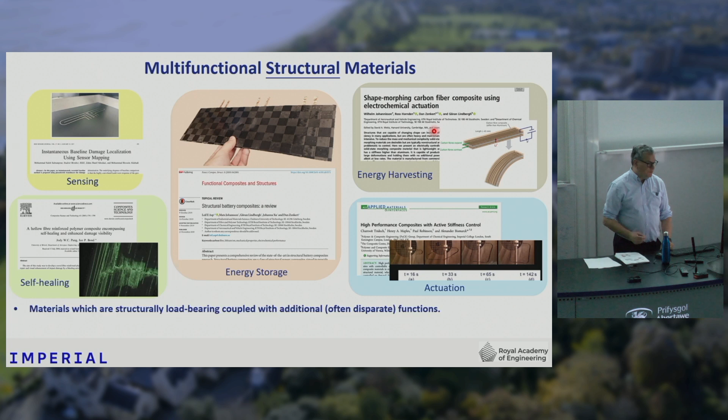What I ought to reinforce first is that we're really going beyond this idea of smart materials and smart structures. There's a lot of work that's been going on for decades embedding sensors or batteries into structures. For instance, this is some really nice work done by the US Navy, going on for about 15 years, looking at embedding lithium-ion batteries into aircraft structures - these are UAVs - as a way of making more efficient structures.

So this idea of embedding devices, embedding batteries into a composite structure, is actually relatively mature. But what we're doing is really going beyond that. We're not trying to embed a structure, we're not assembling a product out of a monofunctional structure and a monofunctional battery. We're actually trying to imbue the same material to do two things simultaneously.

For instance, the carbon fibers that we use within our material carry structural loads - these are aerospace grade carbon fibers. But those same carbon fibers have lithium ions intercalating into them and out of them to add a battery function. So the technology and challenges with this are much more immense than for just embedding a battery, for instance.

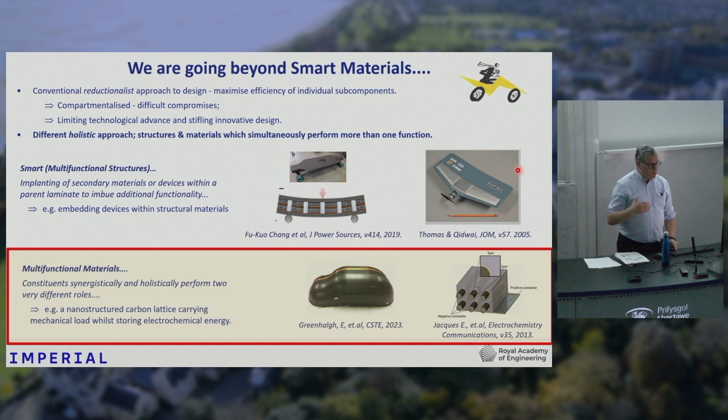But the rewards from doing this are enormous, and I'm going to elaborate on that in a minute in terms of what achieving this idea of structural power materials is going to mean in terms of our day-to-day lives. But to give some context to what's really driven us this way is this whole issue of sustainability and the issue of energy storage and electrification of transport.

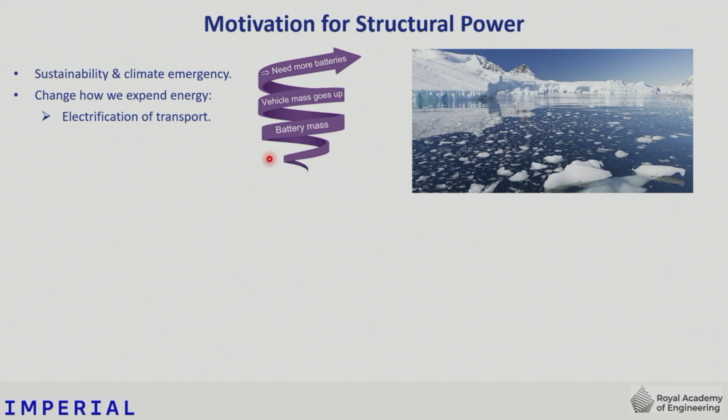So if you're looking at an electric car, the issue you have is that you have a car with a number of batteries in, but you need to put more and more batteries in to improve the range of the vehicle. But adding more batteries adds more mass, so you need even more batteries to be able to do that journey. If you want to double the range of the vehicle, you can achieve that with the same amount of energy by halving the weight of the vehicle. So things like Tesla cars, for instance, about 25% of the weight of the car is actually the batteries. So you're expending 25% of your energy just moving the batteries from A to B.

So that in itself is really not very efficient use of these materials. It's parasitic weight. In aerospace, this is even more of a problem.

There's been a really big drive in aerospace toward the idea of a net zero aircraft, a long-haul passenger plane that's not using any aviation fuel by 2050. The challenge is that if you're using kerosene in an aircraft, about 30 kilograms of kerosene is required for each passenger. If we use batteries with current battery technologies, which have an energy density of about 250 watt-hours per kilogram, you'd need 1,000 kilograms of batteries per passenger. So that's really just not feasible.

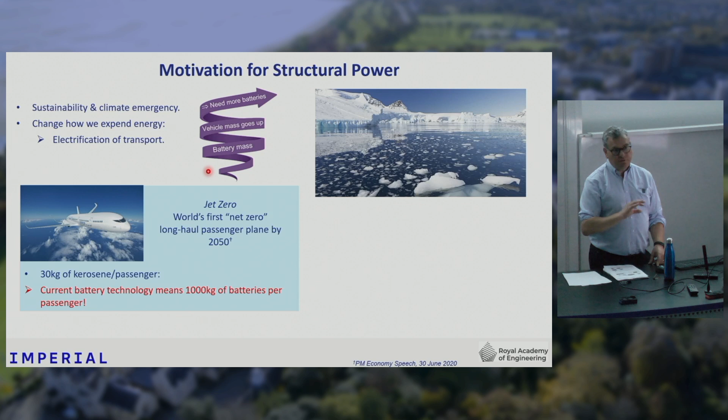If you look at the conventional electrochemistry sector, they're really trying to push forward the energy densities of their batteries, and I've got a graph demonstrating this in a moment. But the issue with enhancing energy density is that you run into sustainability issues, longevity issues. A lot of these very high energy battery technologies have relatively short lives. And there's also the issue of safety.

Aerospace is a very conservative industry. If you try to get a new material onto an aircraft, you have to go through a lot of steps to demonstrate that it's airworthy.

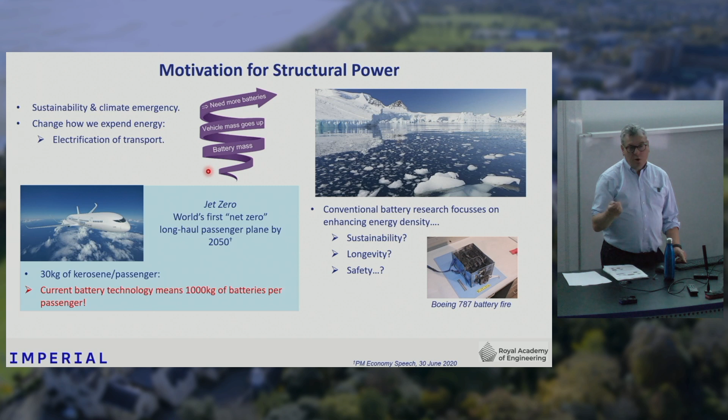So really, we felt that we need a radically different approach to how we store electrical energy on vehicles. Instead of having that parasitic weight of the battery, why not use the structural material to have an intrinsic ability to also store energy? So you won't need batteries. Your car body, the casing of your phone, would store the energy that you need for use.

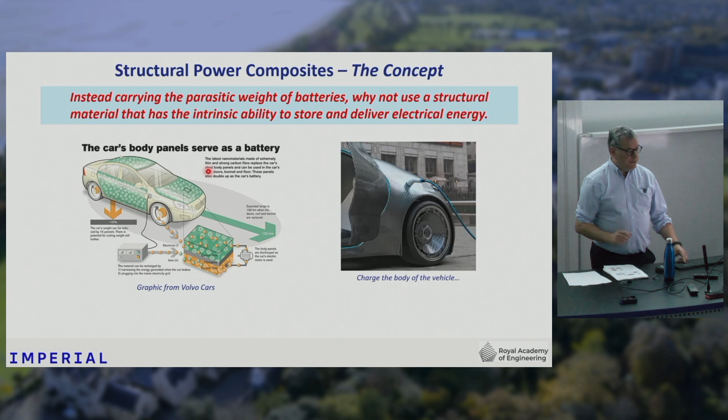We worked very early with Volvo on this concept, and they were very keen on this idea, and we've gone on to demonstrate that this technology is feasible.

There's a lot of synergies here in terms of the sciences. Although we're bringing together electrochemistry and composite mechanics, which are very different fields, there are a lot of parallels. For instance, in electrical energy storage, carbon is widely used as one of the electrodes, or both electrodes in some instances. In structural applications, we use carbon fibers, so immediately there's some synergy there. There's also the issue that carbon fiber composites used in aircraft structures are laminated structures, while batteries, again, are laminated structures. So we thought there were some synergies there we could try to exploit with this technology.

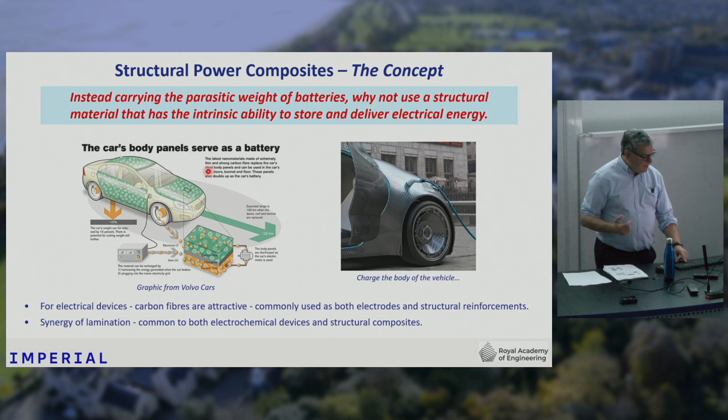Let me share our aspiration for what we hope this technology will achieve. First of all, as with any lightweighting technology, the idea that you could have a material that does two things simultaneously is going to give us lighter vehicles and more spacious vehicles. What we're trying to convey here is that you no longer need this big pack of batteries in the car, so there's a lot more space in the vehicle. What we're showing here is you're charging the vehicle. So in lots of applications, this is going to give us lighter weight, reduced volume, more spacious applications.

But we thought there are things this technology could offer beyond those conventional engineering considerations. One aspect we recognized is that a lot of products, particularly portable electronics, have their actual form factor dictated by the battery. In a phone, for instance, half the volume of the phone is the battery.

So if we could get rid of the battery, and instead use the casing of the phone, which is a structural component, and imbue that with the capacity to store energy, you could have phones as thin as credit cards, because you no longer have to think about where you put the battery. That was something we thought would be very attractive from a consumer point of view, that it suddenly opens up the space to make very slender devices.

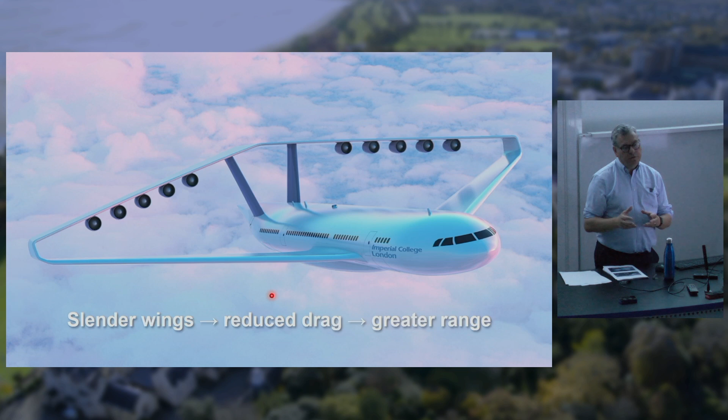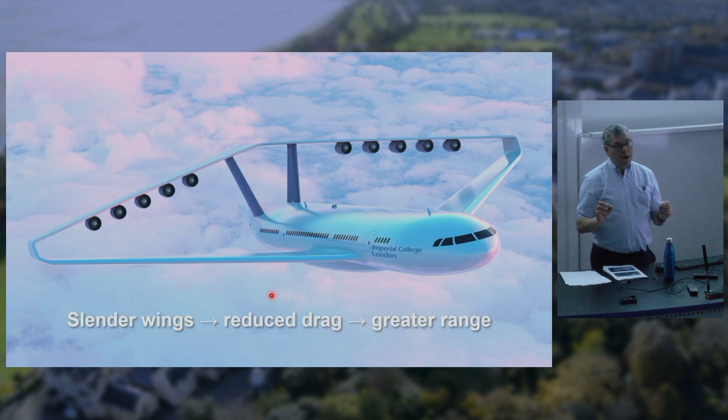As an aerospace person, I was immediately thinking about what we can do in aerospace with this. What we started to recognize was that at the moment for aircraft, you have hollow wings, and the reason is because you need to store fuel there, be it kerosene or batteries. But if the structure of the wing itself or the fuselage stored the energy, you wouldn't have to have hollow wings anymore. So you go to very thin wings, and you reduce drag and improve the efficiency of the vehicle. But if you start moving to thin-winged aircraft, you run into aeroelasticity problems.

So the whole aircraft would need to look different. You'd have to start to look at these box wing type configurations, for instance. One thing we recognize with this technology is that this is not something we can just retrofit onto an existing product. This is going to need a blank sheet of paper. It's such a fundamentally different way of using structural materials that you have to rethink everything.

As we started to think about how we could use these materials, what we started to see was that it offers localization of power storage, energy storage. So rather than having the power source remote from the actual usage of that source, you have an opportunity to bring everything closer together. For instance, in the aircraft cabin, when you're sitting on your seat watching your entertainment screen, the energy driving that is actually coming off the engines of the aircraft.

And if you took away the panels in an aircraft, you'd see enormous looms of wiring. So we thought, what if we actually made the floor of the aircraft cabin out of our material, and then that would power these seat-back displays and the USB ports on the aircraft. I'll show you in a minute a study we've done that demonstrates this offers a huge weight saving. This concept offers an opportunity to localize where you store your energy for a particular application.

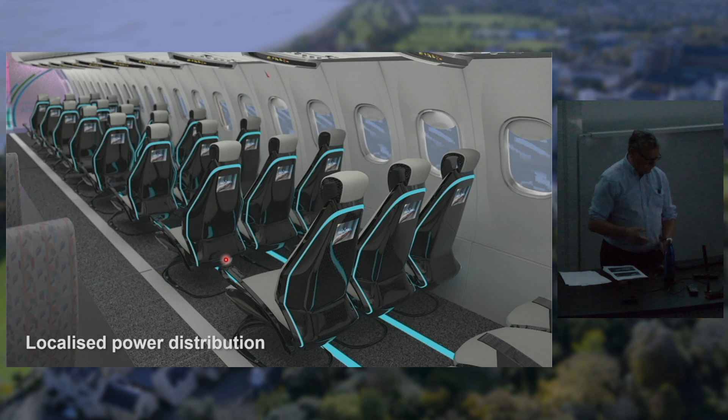Then, in the wider context of how this could go beyond transportation, one thing we started to think about was infrastructure. So where you're looking at using solar panels on your house, at the moment you have to have a great big bank of lead acid batteries in your basement to store all that energy. But what if you actually made the bricks of your house into batteries? So the walls of the building would actually store the energy that you capture with the solar panels.

So this is where we saw this technology going. This is all aspiration - we're nowhere near achieving these things yet, but we're trying to think about where this technology could take us if we overcome the challenges. And I'm going to talk a lot about what the challenges are with this technology.

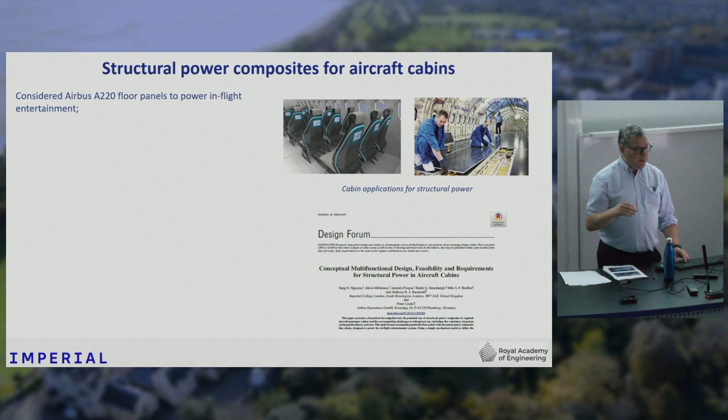So let me focus on that cabin application I spoke about. This is a paper we published 2 or 3 years ago where we looked at an A220 aircraft, and considered using the floor panels to store energy. We started to think about what level of performance we would achieve in the next 5 years or so.

So we chose a modulus for the laminates of about 28 gigapascals, and we chose energy and power densities of 144 watt-hours per kilogram - almost half that of a conventional battery - and a power of 0.29 kilowatts per kilogram, which is akin to what you get with a conventional battery.

So for those of you who are not electrochemists, these are 2 parameters often used to define energy storage devices. The specific energy tells you how much energy you can store per kilogram of material, and that's in watt-hours. The specific power is how quickly you deliver that energy - so that's watts or kilowatts per kilogram.

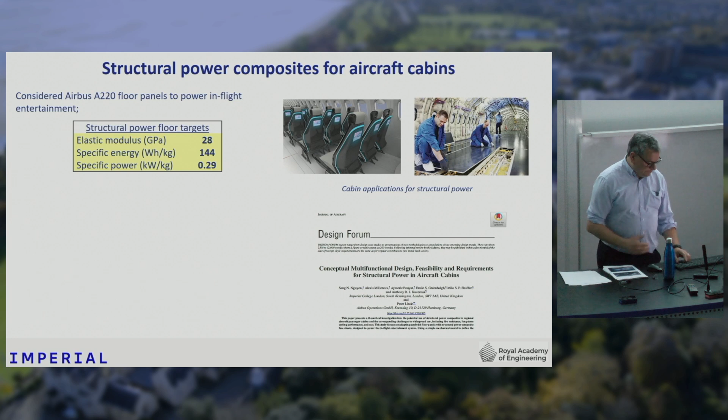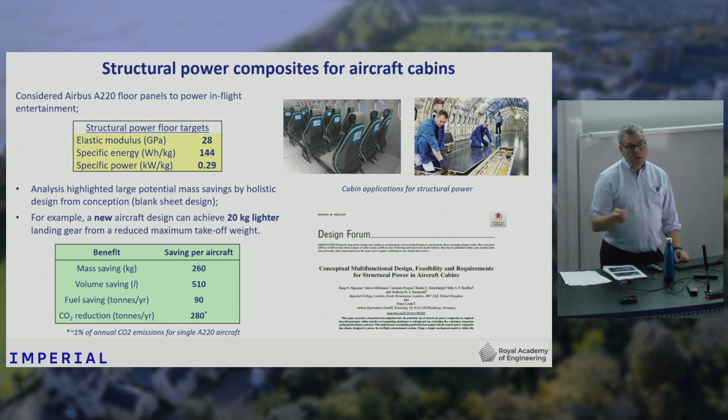Okay, so taking those numbers, we started thinking about redesigning the cabin, looked at all the electrical systems and the electrical demands on that system. We identified that if we took an A220 and put this system into the vehicle, using those performance targets, we'd get a weight saving of 260 kilograms per aircraft - equivalent to about 500 litres of space saved.

We then translated that into CO2 reduction. So for that vehicle, it would result in 280 tonnes per year of CO2 reduction. That's about equivalent to 1% of the annual CO2 emissions of a single A220 aircraft on its typical flight schedules. So this was very attractive, and we think cabins is one of the early adoption routes we see for this technology.

We've also done some other studies trying to understand how this technology could be applied to other areas in aerospace. What we've been trying to do here is identify the target performances we need to achieve in our materials to actually offer a benefit, and that's helping us identify the routes we need to take with this technology.

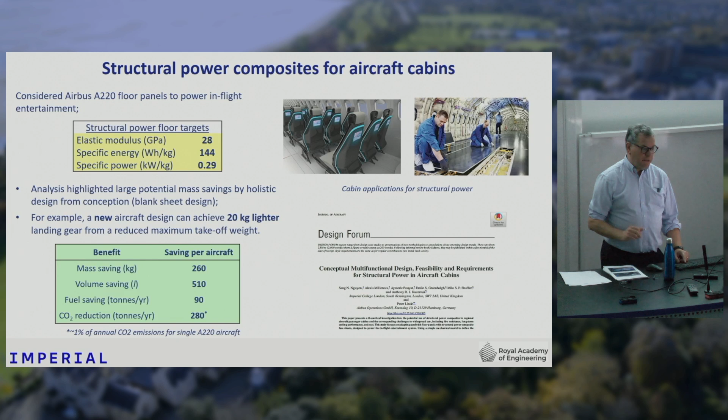These air taxis hold about 4 people. They don't have a pilot, it's all autonomous. Various companies like Vertical Aerospace and Airbus are developing these types of vehicle.

These are fully electric vehicles, and the challenge is that the battery technology is not there yet in terms of allowing them to have a significant, useful range. For instance, the City Airbus vehicle, probably a previous incarnation of the development, has a range or endurance of 15 minutes with the batteries they're using at the moment.

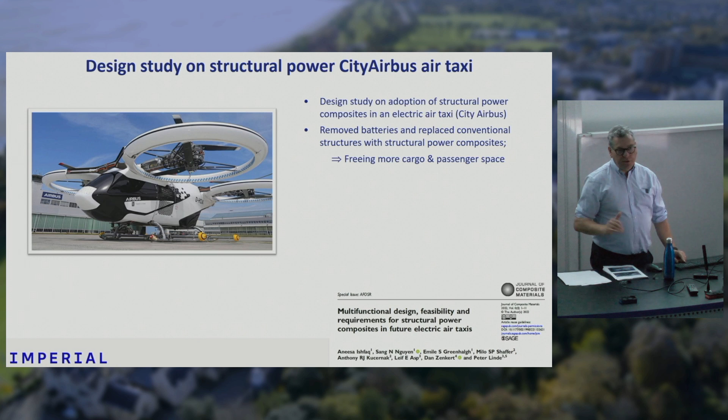So we started to think about, if we took the batteries out and replaced the structure with our material, what benefits could that offer, and what levels of energy density do we need to achieve? This is illustrated here, showing two different sources of energy: conventional batteries, the black line, and structural power material, the red line. This shows the relationship between endurance of the vehicle in minutes and the specific energy of the power source. The take home is that for a fixed energy density, using structural power materials doubles the range of the vehicle.

To put that another way, if you want to fly from London to Manchester, which is 240 kilometres, conventional batteries would need an energy density of about 370 watt-hours per kilogram. That's not a level we're going to achieve in the next 5 or 10 years or so. For structural power material, you need less than half of that, 170 watt-hours per kilogram, which we haven't achieved yet, but it's within reach. So the attraction of this technology is that it will help us achieve electrification of transportation without needing the astronomically high energy densities required for batteries to achieve that.

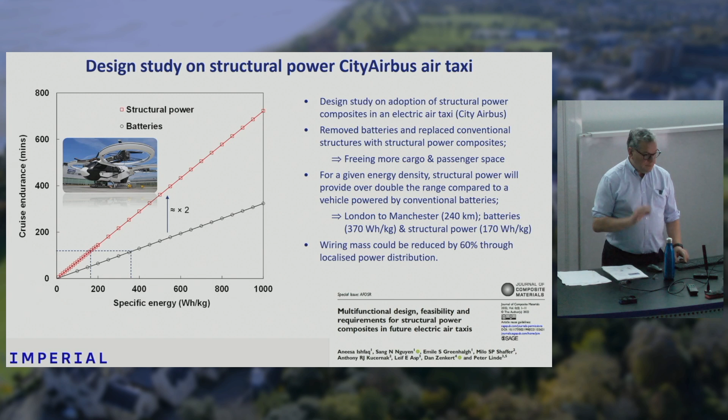But let me focus a bit on where things are with conventional batteries, because you read a lot in the newspapers about new battery technologies coming out with horrendously high energy densities. This graph shows all the different battery chemistries that are evolving and the ones we currently use, like lithium ion, which you're familiar with.

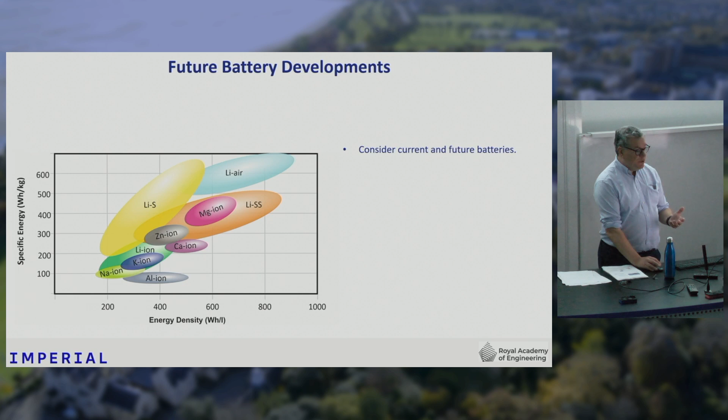This shows the specific energy, how much energy it stores per kilogram, but also the energy density, how much energy it holds per litre of material. Just to put that in context, for a Tesla car, the pack energy density sits at about 280 watt-hours per kilogram.

There's lots of these new battery technologies like lithium sulfur, lithium air, so this gives you an idea of the sort of levels of performance that those offer. However, if we want to go to a fully electric airliner, those batteries would need to be up here.

So if we wanted to have a replacement for the A320, for instance, to fly from here to Greece, you would need an energy density in excess of 1200 watt hours per kilogram. And we're currently at 280 watt hours per kilogram.

To give you a bit more context, if I had a piece of TNT, that has an energy density of 1160 watt hours per kilogram. So we're trying to persuade the aircraft industry to have a block of material which is even more energetic than a block of TNT. This really puts into context the challenges of going for a fully electric, conventional battery-powered airliner.

So we thought, why don't we explore what happens if we use structural power material in this context? What about if we had an airliner which was a hybrid of conventional batteries and structural power material? The wings, the body of the aircraft would store the energy, and you'd add some more batteries to give you all the energy you'd need.

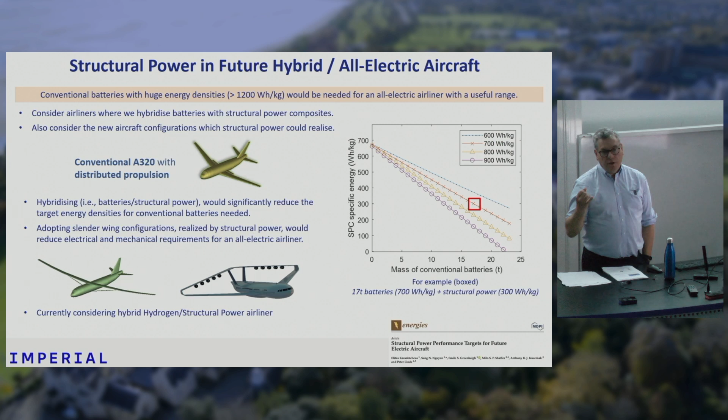The idea, for instance, is that you'd have a hydrogen-powered propulsion aircraft that powers the engines, but then you'd use structural power materials to run the cabin and things like that.

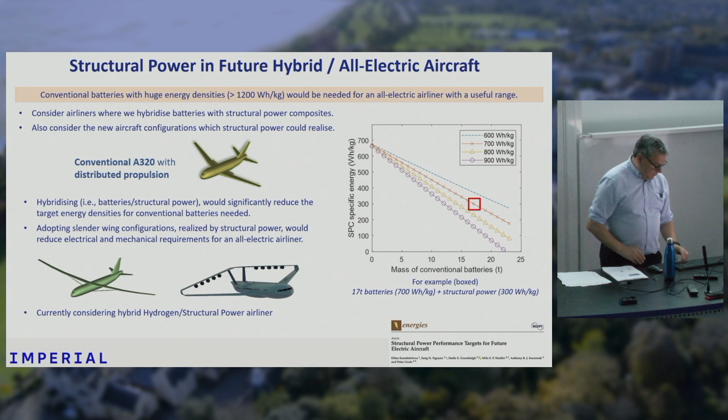Okay, so let me talk a bit about where things are in terms of structural power materials and focus on the technology we're working on. If you talk to an electrochemist, they'll show you this type of plot, which is a Ragone plot, showing the relationship between specific energy and specific power, or energy density and power density if you're looking at volumetric terms.

These are the different types of devices. Batteries have high energy density, but they are very sluggish because they work by chemistry. There's a chemical reaction going from charged to discharged, so kinetics starts to become very important for batteries.

So although batteries can store a lot of energy, and fuel cells are even better in terms of how much energy they store, they're very slow at delivering that energy. The other end of things are capacitors, electrostatic capacitors, the sort of thing you might have used at school. Those deliver energy really quickly, with a specific power on the order of 10 to the 5, 10 to the 6 watts per kilogram, but they can't store very much energy.

So those capacitors tend to be used in energy weapons, lasers, where you want to deliver energy really quickly. What we focused on are known as supercapacitors, which are essentially a type of capacitor.

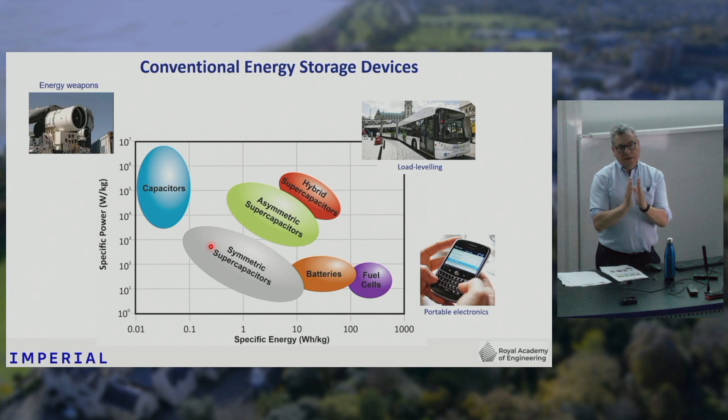So in the supercapacitor, we make that surface area really, really large by making the surface very tortuous, so it's very high surface area. The charges are actually stored at the interface between the electrodes and the electrolyte, so rather than being millimeters apart, they're on the order of nanometers apart. By doing that, you can develop supercapacitors which can store...